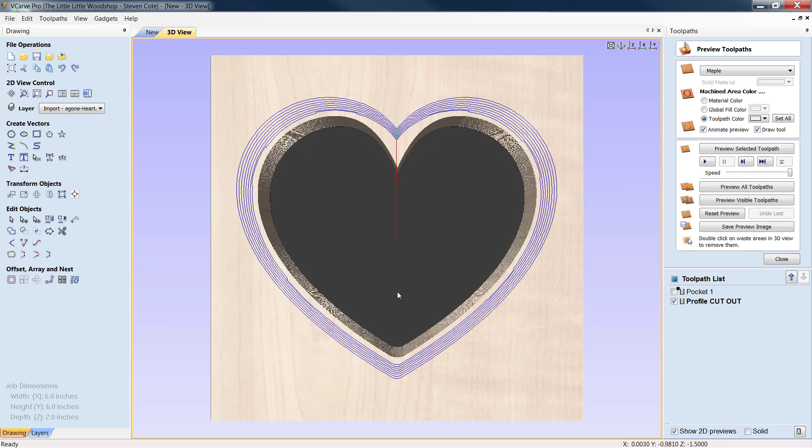We are going to add just a few tabs, 6 will be more than enough. Close it out, and let's calculate it. Yes, we know that we're going to go through the material by 15 thousandths. Okay, let's preview all toolpaths again, and there we have it.

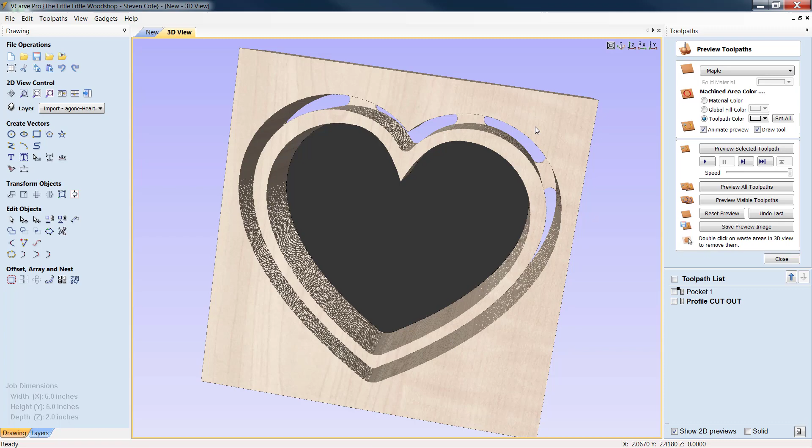We have our full piece all cut out. We have our tabs in. Everything looks good, we have a nice wall thickness. It's going to be hardwood. If you're going to go with a softwood, you may want to adjust to make your wall thickness a little bit thicker to give the piece some integrity. But all in all, I like that. It is a very simple piece, but once it's sanded and done up, it will look very good.

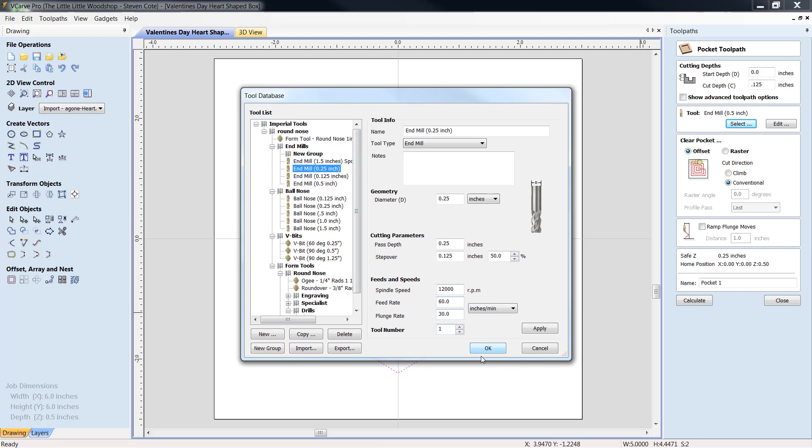Let's come into our tool database here. End mill, 1/4 inch right there. Adjust again, feeds and speeds to your particular equipment. And the reason that I don't feel there are any 2 feeds and speeds that are the same is mainly because we don't all run the same equipment.

Some of you have routers, like myself. I have the biggest router, but yet I don't have a spindle. And you guys with the bigger industrial spindles, well, you can run at much faster production speeds. You need to know what feeds and speeds your particular piece of equipment can run at. A desktop with a little 1 horsepower router is not going to clearly handle feeds and speeds, especially in dense hardwood materials, like, say, a 3 or 4 kilowatt spindle would. It's a breeze for a piece of machinery that big, but you've got to understand you need to slow things down for your particular piece of equipment.

Okay, alright, we're going to pocket out the lid. Let's go pocket, and we'll call this lid. Alright, now with our pocket programmed into the underside of our lid, let's take a peek at that real quick.

Alright, there's our first one. We'll add a little bit of color so that we can see. This is what we've cut out. Alright, let's go back. Now let's go and let's cut this out.

Same thing again, we're going to add tabs. Helps if I highlight the area where we want those tabs first. We're going to call this profile cutout. We have a 1/4 inch end mill in place. We are outside the line.

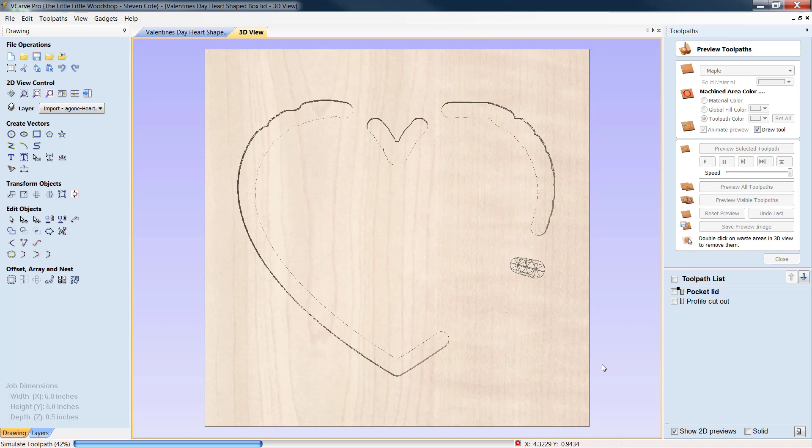With our pocket run on the back side of our lid, as we can clearly see here, we've only gone in that 1/8 inch just so that our lid will seat on top of our box. And if you're completely happy that way, perfect, job's done.

However, if you do want to put the bevel on the outer edge, these are the steps you need to take. You'll run your profile just like you did here. However, you do not do the cutout at this point. What we would do, after we run the pocket, we would take our piece out and do an even flip on it.

Reblock it back in and bring your gantry for your X and Y starting coordinate that you originally put in for this. Retract your gantry, bring it back to your starting position for this piece, and then we'll be ready to put the bevel in.

The bevel is as simple - let's go up to Profile Toolpath. We're going to go in 90 thousandths. That'll be a decent bevel.

We need to select our tool, which will be a 90-degree V-bit, 1/2 inch diameter. Again guys, you'll need to set your feeds and speeds to your particular piece of equipment.

Okay, we're going to call this outer bevel. It's just a personal thing. I've always liked the chamfer or a little 45-degree pitch on a lot of my work, so that's just how I happen to do it. By no means do you have to feel obligated to make these however you see fit.

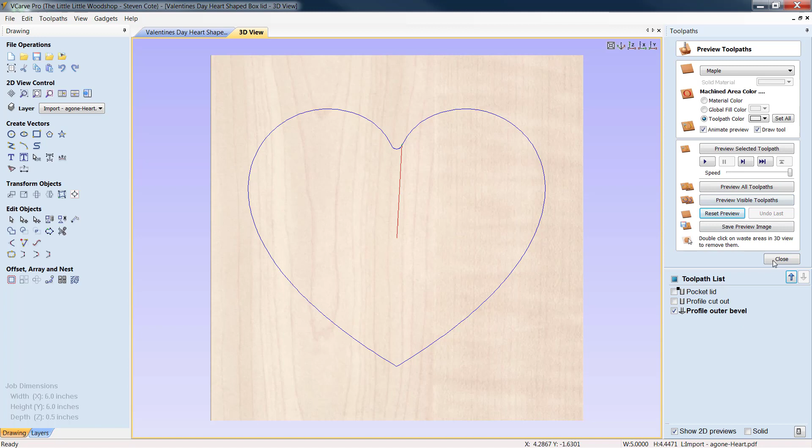Basically, by doing this on the inside, I know that the very outer point of that bevel will be the very outer edge of the box. So again, it will leave just a nice little chamfer on the edge if you choose, nothing more, nothing less.

Then we would turn around and we would run our cutout at that point. You are going to need to show advanced toolpath options. You will need to come down to your cutout for your inside left, but then whatever you had set for your depth of your bevel, put here.

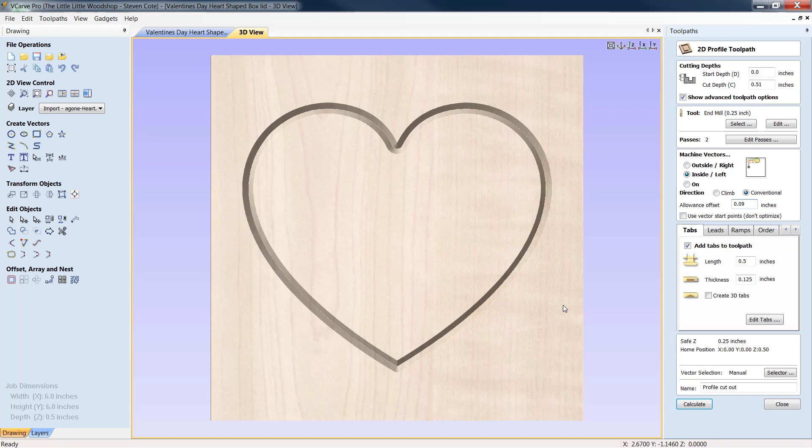We did our bevel at 90 thousandths, so we're going to do our offset at 90 thousandths. That 90 thousandths is going to be the difference from the very top of that box to that very bottom edge. Alright, we would calculate.

Alright guys, well that's pretty much all there is to it. This is our lid. Although the picture does not depict the beveled edge very well, nonetheless it is there. Now, you can choose to bevel or no bevel.

That's entirely up to you, or you may choose to put in a different forming bit and put a different edge around it.

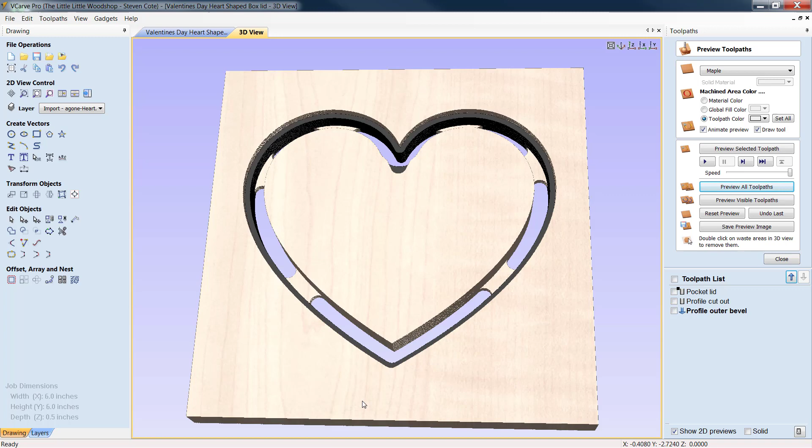I don't know, that's going to be entirely up to you, but this was a simple box, simple to make, and it will all be included in the package again for you guys to download. Feel free to do with these as you see fit, okay?